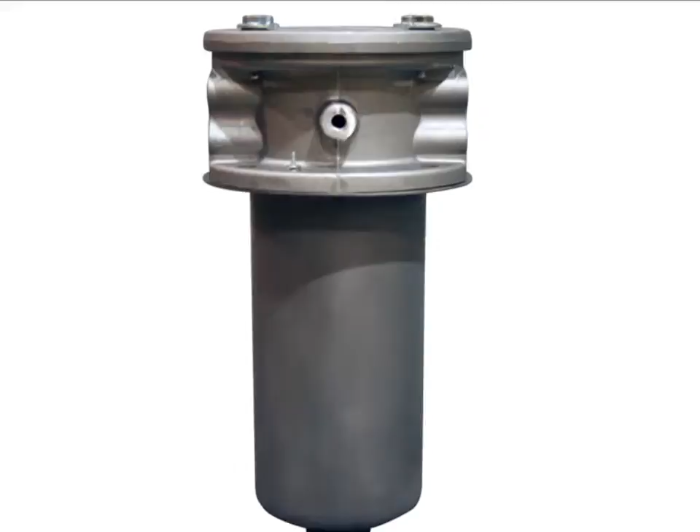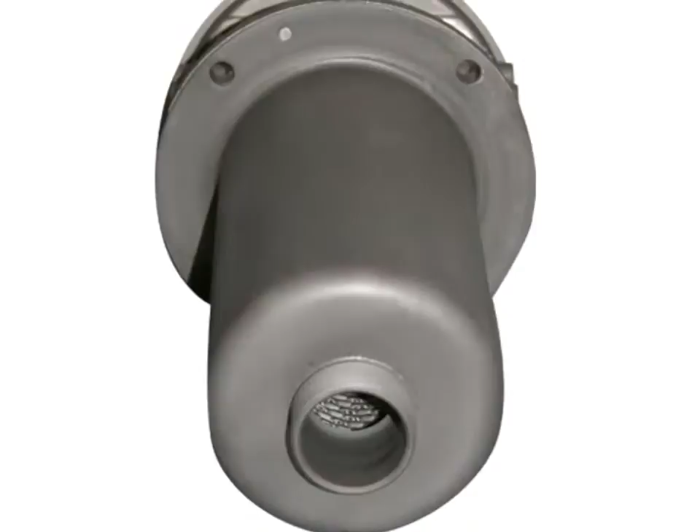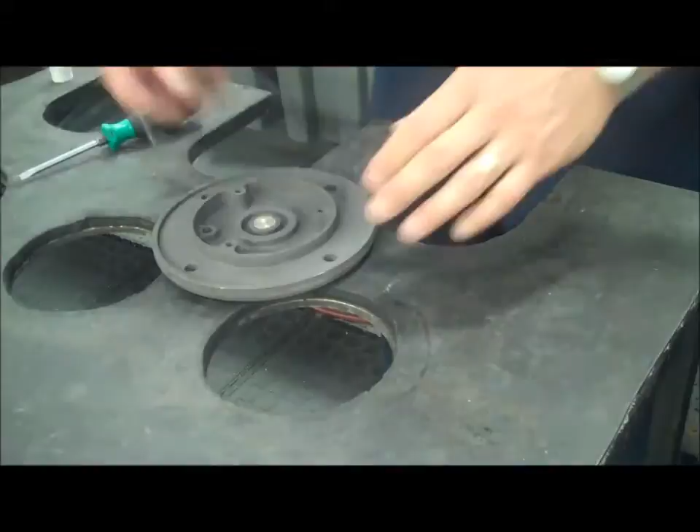Today we're going to show you the assembly of building an in-tank return line filter. This is a very simple filter to manufacture. After you look at this, we're going to get into proper sizing of filters in the system. If this filter isn't sized properly, you'll end up with a lot of problems, and more than likely the filter will be in bypass.

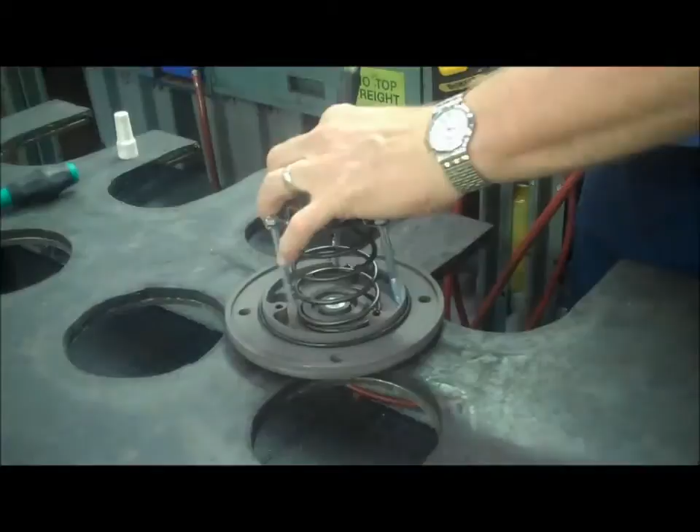Here we're just showing the assembly of the filter cap and the bypass assembly. The assembly is attached to the cap for convenience and for less loose parts.

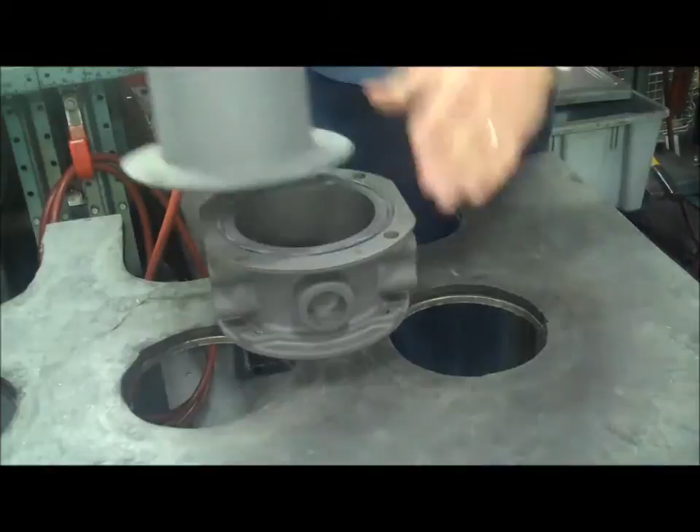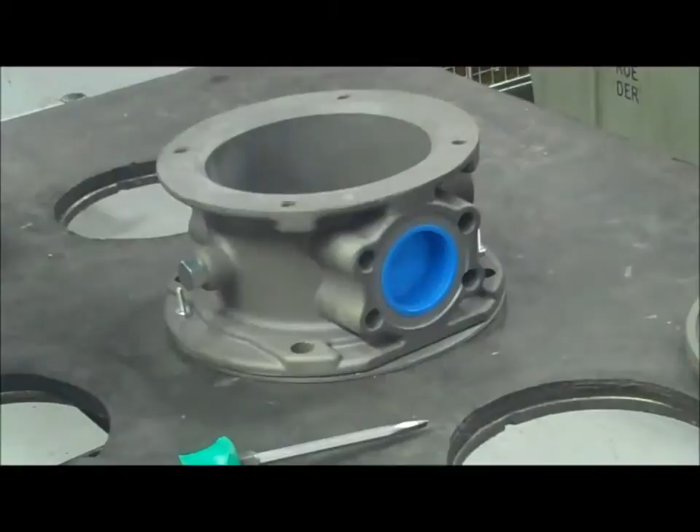The O-ring is installed into the filter head, and then the canister is attached to the filter porting head. There are two shipping screws that are installed to hold the canister to the head. They do not have to be removed when you install this into your system.

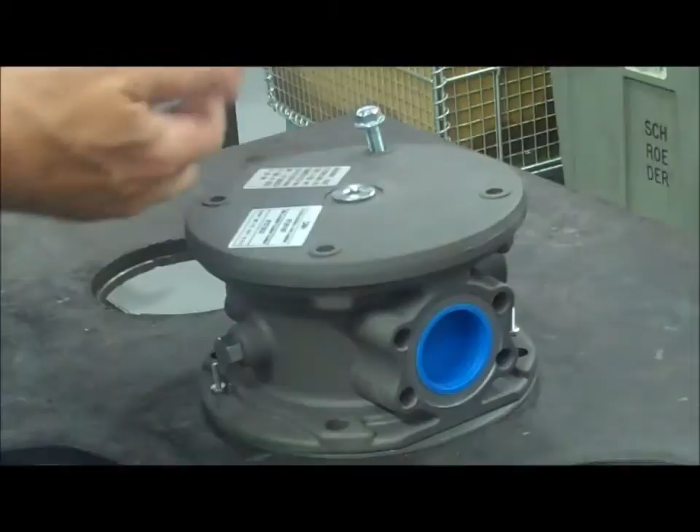We're inserting the element, and we're about to insert the cap. First we lube the O-rings so we don't have any cuts in the O-rings. And that's the assembly of the Schroeder in-tank filter.

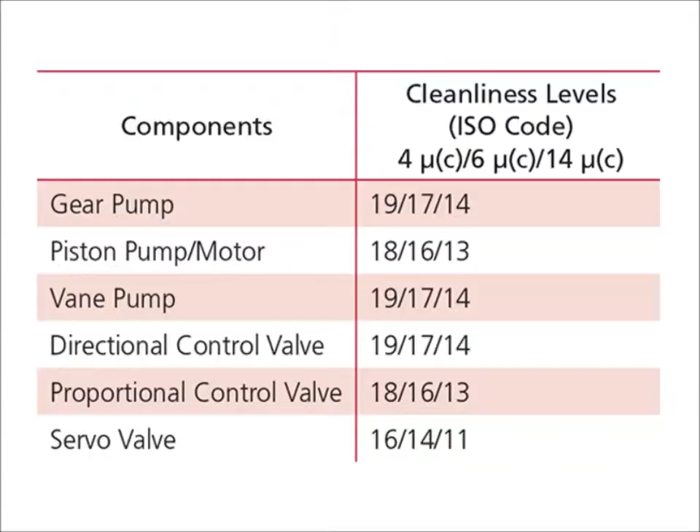The next step you need to know is the flow, and of course the pressure. Where am I going to put my filters? Am I going to put them in a return line, or am I going to put them in a pressure line? Ideally, if you can put them in both places, it'll increase the life of your system.

The next thing you need to know is, what is the viscosity of this fluid? The viscosity of the fluid determines the initial pressure drop. Now, what we try to do is size these filters so that the pressure drop is no more than 50% of what the bypass setting is.

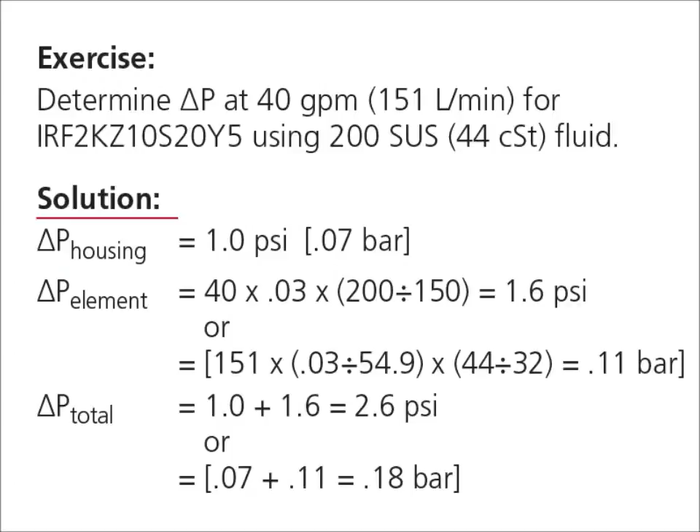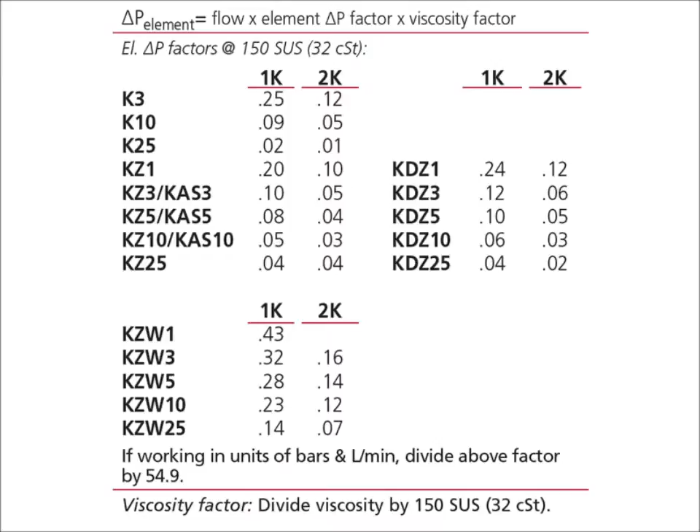This chart shows us basically the formula: the element delta P equals the flow times the element delta P factor times the viscosity. These delta P factors, as you see here in three columns, are determined using 150 SUS fluid. You need to know this because to size it properly, we want you to size this filter so the clean overall delta P — that's through the element and the housing — does not exceed 50% of the bypass setting. In the case of the Schroeder filters, the majority of the bypasses are set at 40 psi.

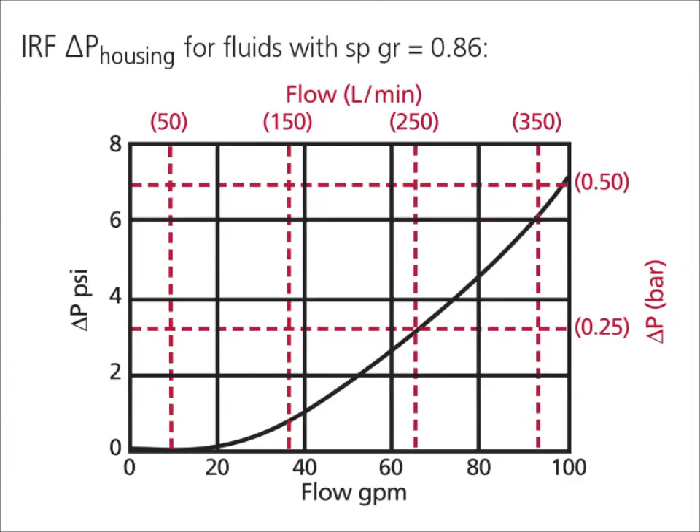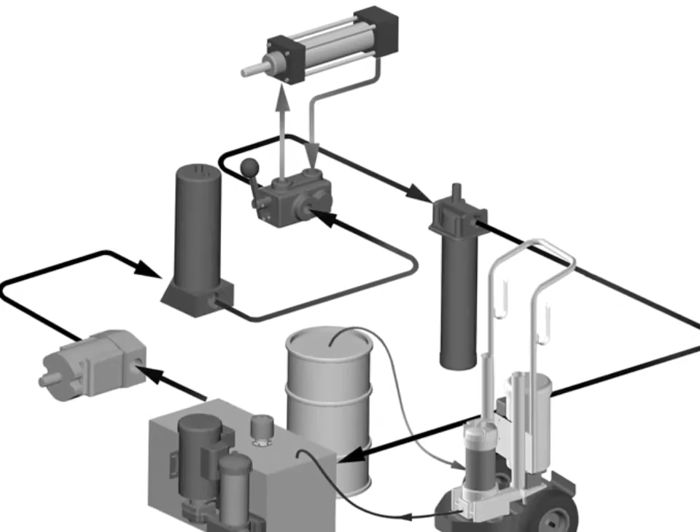If you follow these instructions, or go online into our catalog, in the first section of the catalog — the principles of filtration — all these formulas and all these graphs are available there, plus the graphs are on every page that the filters are on.